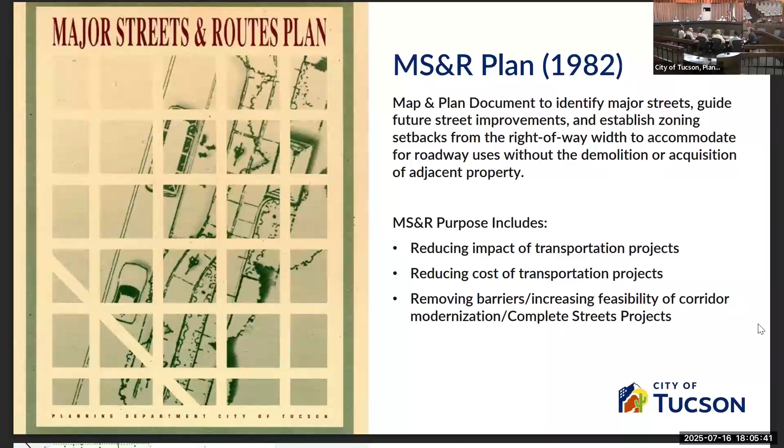If you don't have 5 feet back of a curb, you're not going to acquire property and take somebody's business to put in a sidewalk. It just doesn't pencil out. So this is a tool to allow us to advance those types of investments.

At the simplest level, the MS&R map does 2 things for city policy. It identifies future rights of way to facilitate long-term transportation investments. That's the value you see on the map: 120 feet, 105 feet, 100 feet.

That is how much space we need to address the proposed or planned transportation project. Goal 2, or purpose 2, is that it establishes street designations, the functional classification of the roadway. We talked a bit about this last time. That is calling roadways either arterials or collector streets, which describes how that roadway operates within our transportation system.

The presentation tonight breaks down both of those intents or goals. The specific goal of the 2025 update really has 2 parts. Goal 1 is that we've been doing a lot of transportation policy and planning work over the last 5 years, instigated through the passage of the Complete Streets policy by Tucson's mayor and council.

As an outcome of that, we've developed a new street design guide, which changes our cross sections of our roadways, basically how we allocate space within the amount of space that we have in the roadway. So 90 feet of right of way can look very different today than it did 10 years ago. How would we use that 90 feet of space within the roadway?

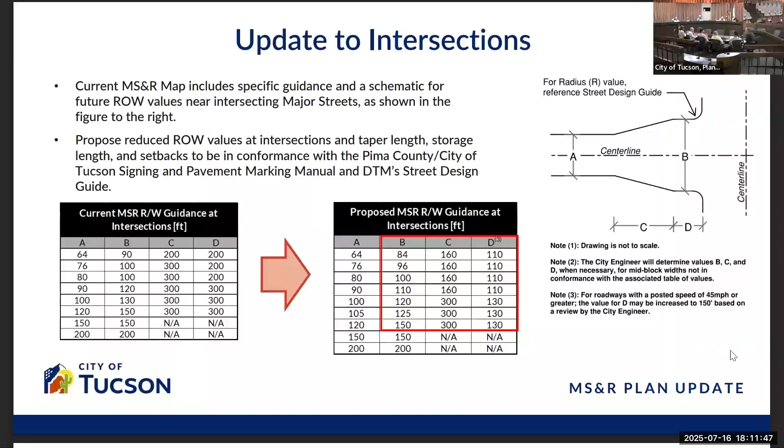In terms of the HAMP or the Atterbury Trails area, we revisited the Atterbury Trails infrastructure plan to make sure we were aligning the rights of way with what is being proposed in those developments in the state land in the southeast of the city.

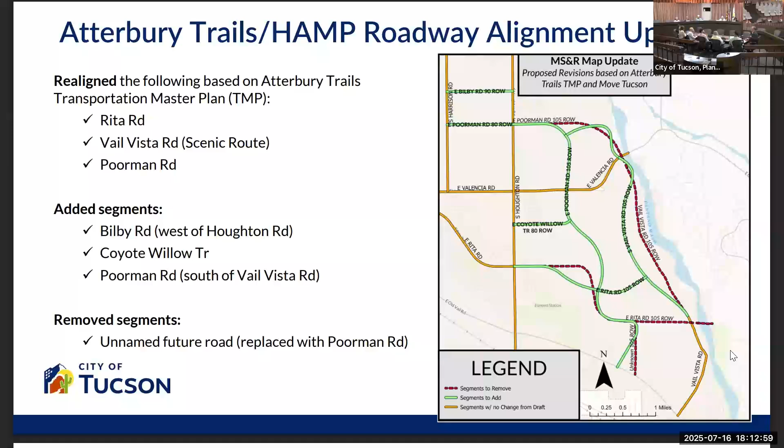We had a lengthy conversation last time about the purposes of the major streets and routes plan versus our transportation investment plans. We have two distinct plans that serve different but complementary purposes. Move Tucson is our long-range city-focused transportation investment plan, identifying specific needs on our corridors, proposed cross sections, project scopes, costs, and prioritization of when those investments should occur. It is comprehensive to the city and is one of the ways we advance our complete streets policy by identifying not only where we want to invest, but what our highest priority investments will be.

Those high priority investments were largely driven by the safety profile of the corridor, the lack of facilities for more vulnerable roadway users such as people walking and biking, as well as location within the city. We were over-investing in areas with a higher concentration of transportation vulnerable populations. We were deliberate and explicit in wanting to invest more heavily in safety projects, active mode projects, and lower income areas of the city, knowing those were more critical lifeline transportation choices for people who didn't have as much access to private automobiles.

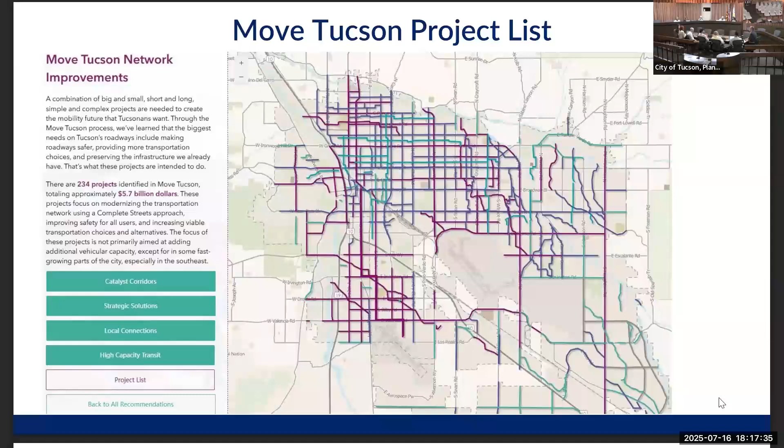We have bike boulevards, which will be on local streets. We have greenways, which will be following along water courses within the city. And then we also have projects that are transit operation projects or BRT projects or signal projects, which don't really have a right-of-way impact. But this is the totality of Tucson's planned transportation investments over that 20 to 30 year horizon. Again, the vast majority of these are modernization, safety, active modes type projects.

Another output of Move Tucson was something that we call the street typology, which is a complementary designation of roadways, which is guiding the way we design our streets in Tucson. The intent here is to give us direction for context-sensitive design efforts.

So the idea around context-sensitive design is that something like an arterial is a bit of a crude tool when you're thinking about how a roadway operates in your transportation system. An arterial, Congress is an arterial, and Houghton Road is an arterial. Those are very different roads. They operate very differently in our system, but they have the same classification or designation.

So what we did is we created this street typology, which guides us in how we allocate space in our rights of way, based on the complement of transportation to land use. So on the far east of the city, where you see that red-orange color gradation, we call those suburban thoroughfares and suburban connectors. Typically, those are serving areas with larger setbacks, more access control, typically lower bike and pedestrian activity, and typically longer trips that you're serving. So those design decisions are going to be driven more by that.

Whereas you get closer into downtown, you have what we're calling urban thoroughfares and urban collectors, which again, you're going to see more active mode users in those areas of the city, maybe more transit usage, maybe shorter trips, opportunities to offset some of those trips. You're going to have a more dense roadway network, more signals. So we are making design decisions on our corridors based on that typology. And then we have one more layer on this.

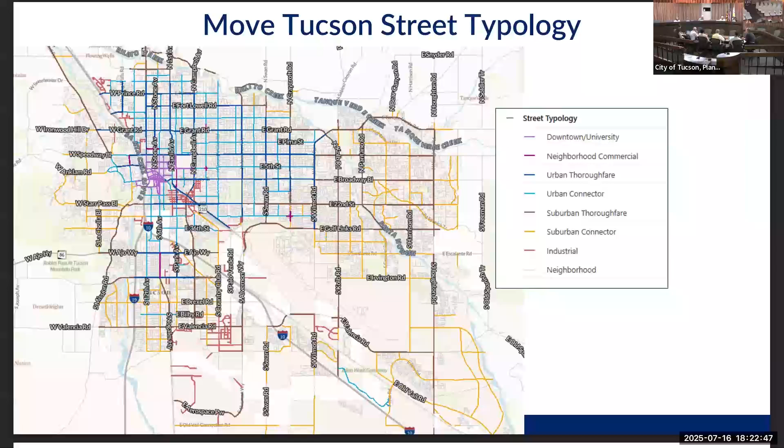Yep. Great question.

Can you elaborate on what a regionally significant corridor is going to mean for Glen? I believe that's Grant - I don't believe Glen has been identified as regionally significant. Oh, is Glen a bike priority street? We've actually got a project on that. Oh, I'm sorry, okay, never mind.

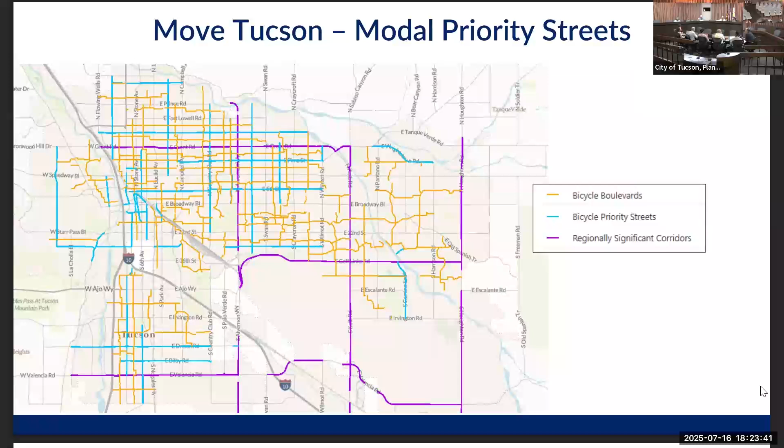On that note, I want to point out it looks like Oracle is not listed as a regionally significant corridor because that's a state route. Correct. Excellent observation - there are a couple on here that we need to revisit that are missing. If you notice the gaps too, that's where it comes in and out of city limits, so some of those are county facilities - we were just showing what's in the city. But Oracle absolutely is one. There's a regional plan driving this.

We can talk a little about how Move Tucson flowed into the major streets and routes, and how we were trying to be really attentive to meeting the goals of Move Tucson through this, and again trying to be a bit more surgical in our approach. So this is the decision flow chart we started with, and we're pulling back the covers now on our MS&R update.

This was the decision tree we went through when making those initial assignments. We started with that street typology and that modal overlay. The first place we went was within the downtown university district - we said we don't need additional right-of-way, these areas are kind of at their future build out.

This is not the purpose we're trying to solve. We're not adding additional capacity here, and we don't want additional setbacks. We want that human-scale walkable environment, the zero lot line development. We don't have needs there as a department, so let's put a zero value on those as an overall policy. Anything in the downtown area, anything around the university, is getting that zero value by default. We can talk about an example of that.

The next tier down, we looked at all of our 234 Move Tucson projects and where they were falling on our major streets and routes. We looked at that preferred or general cross-section from our complete streets efforts. The projects were really driven by deficiency—if we had a safety problem, if we were lacking sidewalks, if we didn't have connected bikeways, or some other deficiency on the roadway, we looked at that right-of-way value from Move Tucson. That was the value we wanted. So it wasn't just being reactive to traffic volumes; we were really trying to make sure we were accommodating the proposed projects.

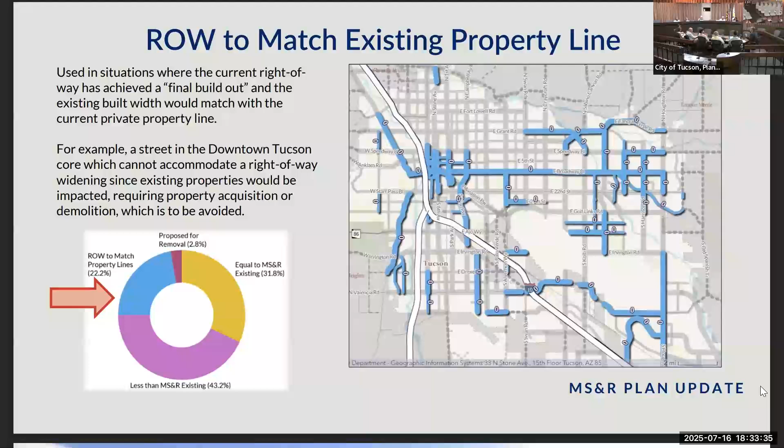This is 22% of the network under the proposed update. So there's a pretty substantial piece of the MS&R where we are functionally removing that piece of the MS&R on about 22% of our network under these updates. So again, there's not one size fits all, but we're trying to be strategic, remove those obstacles to infill development and redevelopment while also meeting our travel needs.

The Move Tucson project we have proposed is a bus rapid transit project. That BRT, if and when it comes to fruition, is going to operate in either a dedicated running way on one of those travel lanes or in mixed traffic. We don't need additional capacity for that. So this is that context. We've got those wide sidewalks, kind of that zero lot line development. And our current MS&R actually is holding this as 120 feet. And that has actually recently been a case where that has been a barrier, an obstacle to infill development.

120 feet is the same right of way width that Speedway is carrying. That assumes that Speedway or Stone basically into downtown would be a 6-lane roadway. And nowhere in our plans is Stone into downtown becoming a six lane roadway. So with this update, it's an opportunity for us to adjust. But up until now, we've been carrying this as 120 feet of right of way.

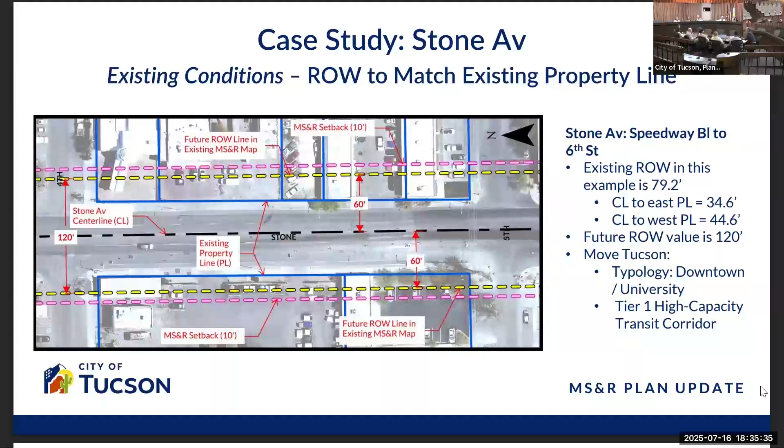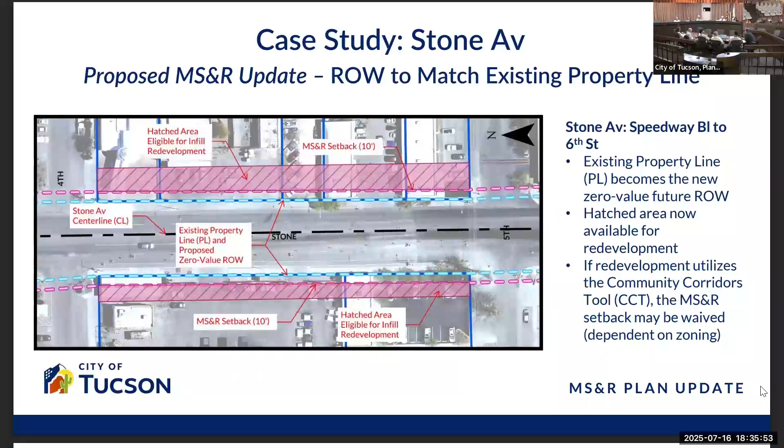So we don't see the need to maintain that 120 feet. And we think Stone Avenue as it stands right now is meeting its transportation purposes. And we are comfortable removing that right-of-way value. The current right-of-way on Stone Avenue is about 80 feet, so that would add about 20 feet of additional setback. So that whole area then in purple now becomes available essentially for infill development, intensification of those parcels, and they become much more attractive to developing along Stone Avenue, keeping that existing character of the corridor. And that was a decision we made based on what Move Tucson showed us about our travel needs on Stone Avenue. So we were comfortable putting that zero value.

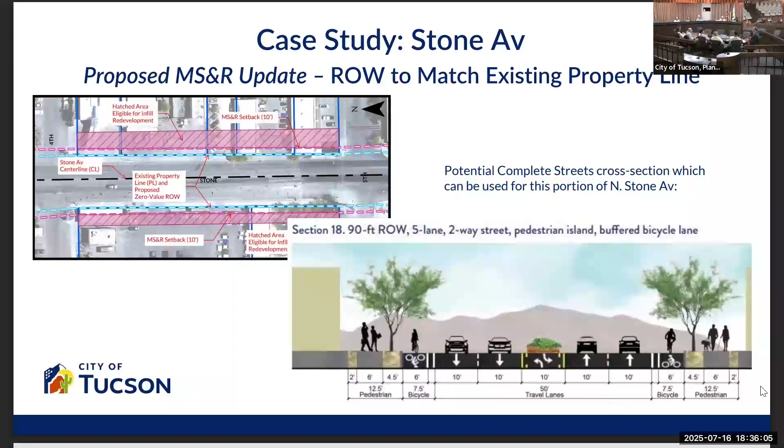And we've done this around the city, but we just wanted to illustrate it with this particular case.

The other largest change that we are proposing is the reduction, but maintaining a value, through the major streets and routes. So these are all the corridors where we are actually reducing the right-of-way from the current value to a proposed reduced value, but still retaining a value. So this is where we'd be going from 120 feet to say 90 feet, and we only need 90 feet of right-of-way to deliver our transportation project. So that's going to eliminate or remove a major obstacle to infill or development, while still providing enough space for us to advance our transportation goals.

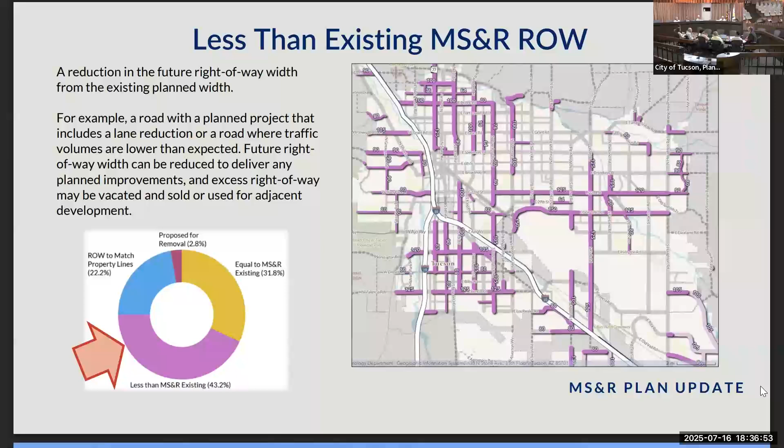Between the removal of the MS&R, the zero value or build-to-lot-line, and the reduction, that is about 70% of the updates being proposed with this update. So only 30% are keeping their existing value. And there is not a single road in which we are increasing the right-of-way value. We were deliberate with that. We started this by saying it's going to stay the same, it's going to get smaller, or it's going to go away. In no case is it going to get bigger.

One we heard a lot of comments about through this process was Pima. From Alvernon to Swan, the existing condition is uncurbed, no street lighting, no sidewalks. There are bike lanes or shoulders, 11-foot travel lanes. It's pretty undeveloped, not necessarily meeting our complete street goals as a city. The current right-of-way on this corridor is 90 feet, which is what we are holding through the MS&R, and that could be a very comfortable 3-lane or a constrained 4-lane roadway.

The existing property line or lot lines along this section of Pima vary between 80 and 90 feet. So a lot of the setbacks are already meeting that 90-foot setback. We're not actually, on redevelopment, going to be gaining space on this.

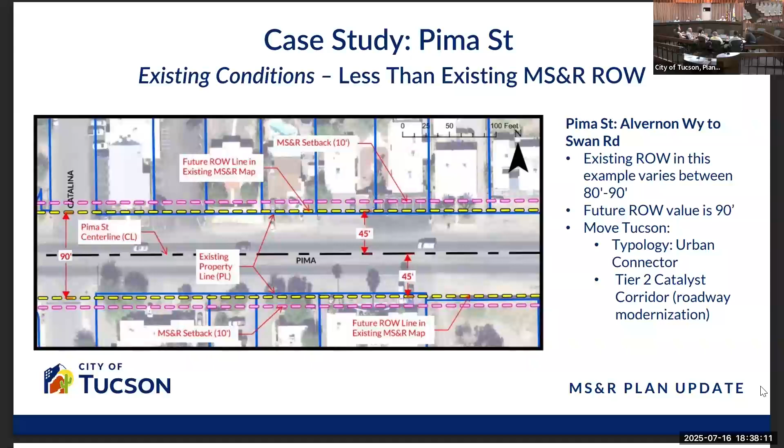But we looked at the needs under Move Tucson. It was identified as an urban connector type project. Based on the traffic volumes and what was needed, we are proposing this as a modernization project, for which we only need 76 feet. So what we are proposing is reducing this from 90 to 76 feet.

What this does is for residents who are at that 80-foot setback, it gives them greater use of their property. If they're at that 80 feet, they are within the future half right-of-way, so there's going to be a lot of restrictions on how they use their property if they wanted to do some things within their existing lot. A lot of these are residential, with some multifamily.

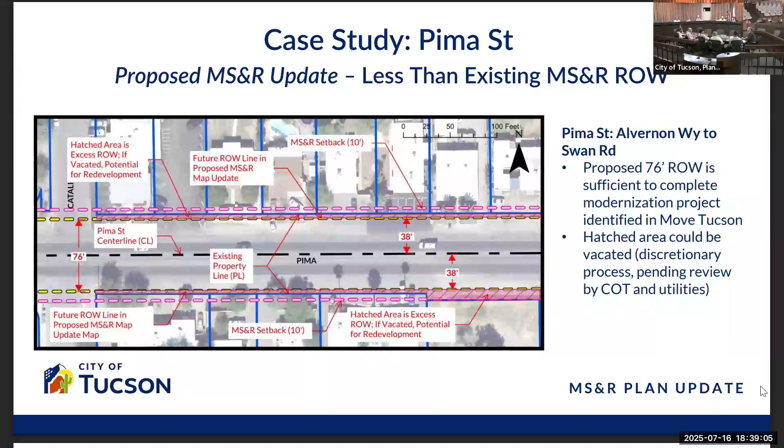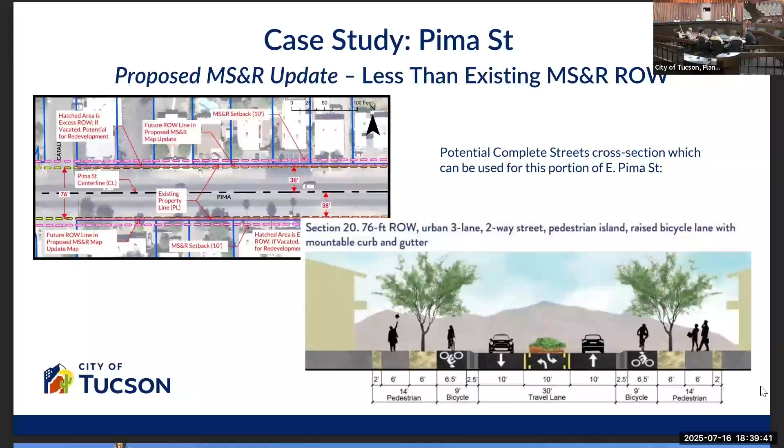That's a 3-lane roadway, with narrow travel lanes, protected bike lanes, a wide landscaping strip, and wide sidewalks. We heard from a lot of residents that they want to see this on Pima, and they were concerned about that reduction in right-of-way. Based on what we have around the city, 76 feet provides more than adequate space to make that investment.

It provides some opportunity for residents, especially those with narrow rights of way, to not be an obstacle to their projects. Here's another case study where we are reducing the future right of way - this is First Avenue, Fort Lowell to Grant Road. We were carrying 120 feet on this, again like Speedway, assuming this would be widened to a 6-lane roadway, consistent with the RTA plan. This was proposed as a 6-lane widening, but we have subsequently downscoped this project to a 4-lane divided roadway, which means we no longer need that 120 feet.

However, we still do need some feet. If you look at the current condition of First Avenue, most of the right-of-way out here is about 75 to 80 feet for 5 lanes, which means everything is absolutely squeezed down. You see off-street parking encroaching into where that sidewalk area would be, and there are no sidewalks on large extents of this. So to really build out a comfortable 4-lane roadway, you probably need around 105 feet of public right-of-way. Currently, we have that 75 to 80.

So in the event that there's redevelopment that occurs before we get out there and do our big capital project on First Avenue, we don't want to make this a zero value so that they're building into the right-of-way - then we would have to purchase and demolish that property. So by keeping that 105, we keep them out of the project footprint, and we can advance this in the event that in the next 2 to 3 years there's any new development on First Avenue as we prepare the First Ave project.

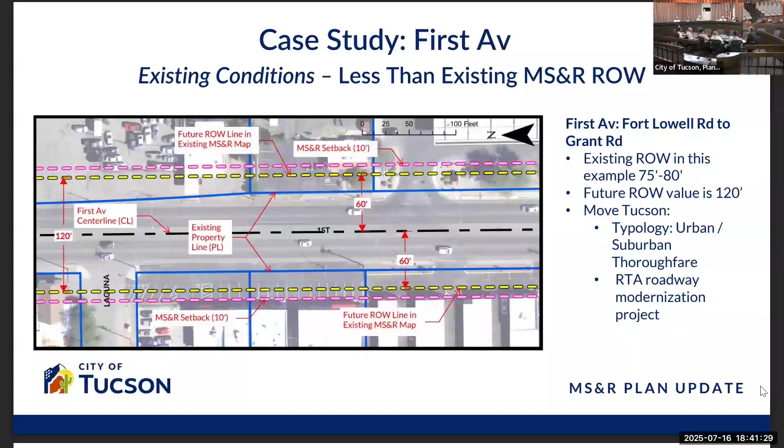So we need that 15 to 20 feet to really reduce costs and reduce impact. One of the great things about this First Avenue project is that by going from 6 lanes to 4 lanes, we have significantly reduced the number of buildings we have to touch and the amount of property we have to take. But 75 feet is just not enough space to get what we need in this roadway.

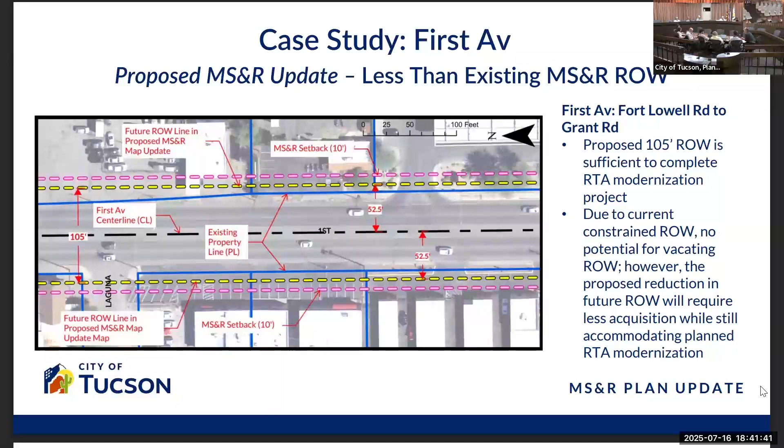And then the final piece, about 31% of this update, is just retaining the existing dimension on the MS&R. This is one we want to point out - Speedway, Alvernon to Swan. I mentioned this earlier: this is an existing 6-lane roadway, and this one is squeezed to basically its absolute minimum of every possible dimension. You have a 5-foot bike lane next to 6 lanes of traffic, and every one of those travel lanes is 10 feet.

So there is not another foot. We have frequent transit service on Speedway. And as you can see, just outside of the curb in front of the bowling alley, you have parking that is on private property that is basically sitting exactly where you'd want to install those sidewalks.

So if we wanted to even just get sidewalks onto Speedway, that would be extremely cost prohibitive, because if you look on the other side of the street, kind of through the median, it's even tighter. The on-street parking stuff we can deal with, but we have structures, we have porches, we have all kinds of things happening within that 6 feet that we have to be able to install a sidewalk.

And even in some cases it is off-street parking, but it's the only parking for that business. So if we take that parking, that business is probably going to have to close their doors. So we are proposing that we retain that 120 feet on Speedway to give us some chance at some date in the future of getting accessible sidewalks on Speedway, which I will be a very happy man if I retire from the city of Tucson with sidewalks on Speedway.

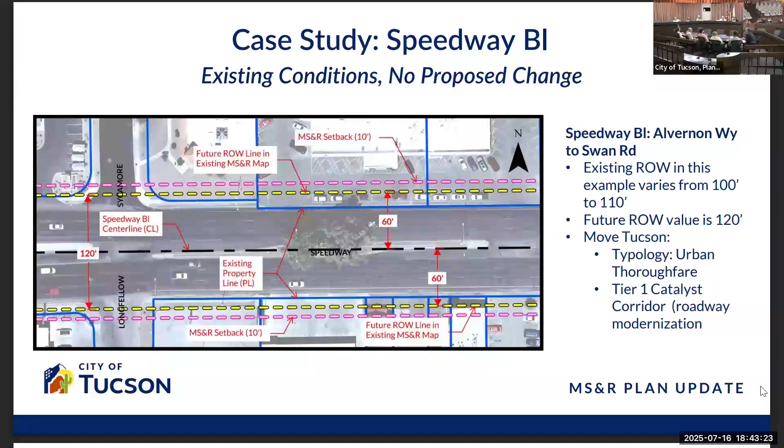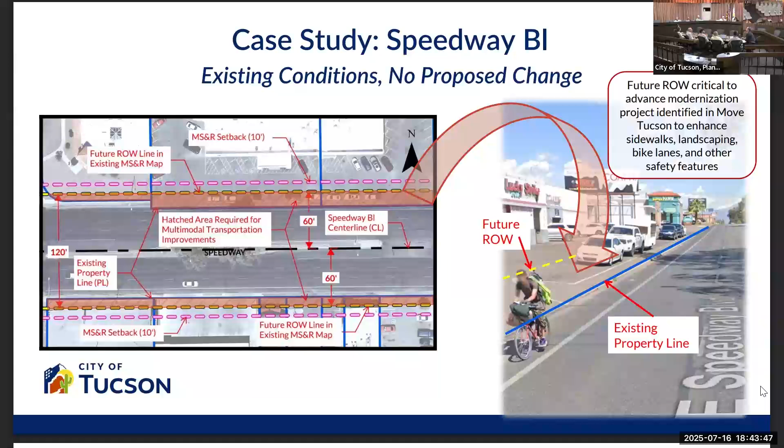I'll just show you. So this is an example of where that future 120-foot right-of-way line would be, that yellow line on the image. You see it puts it behind that off-street parking, which isn't as much as we would want, but it does at least give us an opportunity to get those sidewalks in on public right-of-way, which wouldn't be a major obstacle and completely cost prohibitive and disruptive to those businesses.

The longer term vision that we have for Speedway, and you can see it kind of in the cut sheet in the bottom right there, would actually be potentially going into the middle of the roadway. This is when we were carrying those 22-foot medians. I know there's some beautiful trees in there and other things.

But if we want to get space and not be knocking over and doing a bunch of demolitions, and get those low stress bikeways in there, get the landscaping where the people actually are, and get connected sidewalks, maybe there's an opportunity to take 6 to 8 feet out of that median and fit all of that in within that 120 feet, in the event that we get that kind of major capital funding for a $70 million project in the future.

In the medium term, though, if we could just get those sidewalks in, that would be a huge win. So that is really to illustrate the value of what the MS&R does and why it's so important, because otherwise, if those buildings keep redeveloping along where those current parcel lines are on Speedway, that's going to be extremely difficult.

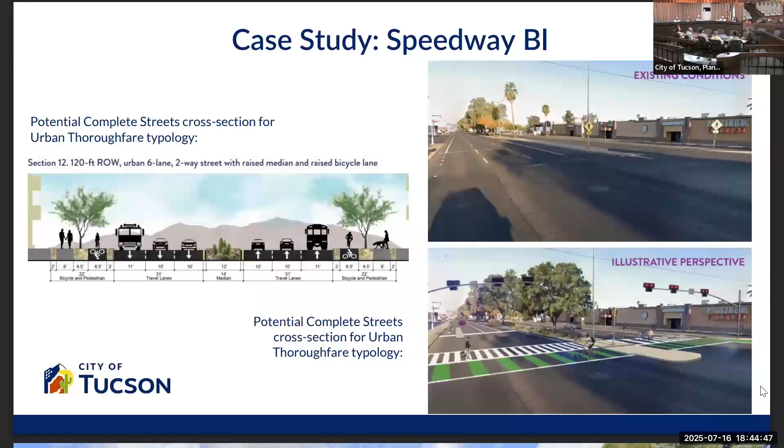And finally, one final one, again this is one where we would be proposing a roadway widening. This is Irvington from Kolb to Houghton, 2-lane, uncurbed, kind of more rural context. There's been a lot of development on the southeast. We continue to see that with Atterbury Trails and the Hamp area.

Traffic continues to grow. We are carrying 105 feet out here. We actually have 150, so way more than enough, but we just want to make sure that we are reserving enough space, because the long-term plan for this roadway, being a more rural context, actually provides some interesting opportunities.

Wait for it. Almost there.

The ultimate build out would be a median divided 4-lane roadway, but because it's more rural in nature, we could take additional right of way and reserve that to have offset more like side paths, recreational trails, outside of a more urban context where you do something like a traditional concrete sidewalk. So in a case like this, you might want to reserve a little bit more right of way, again not necessarily just for the roadway widening itself, but to accommodate those recreational users.

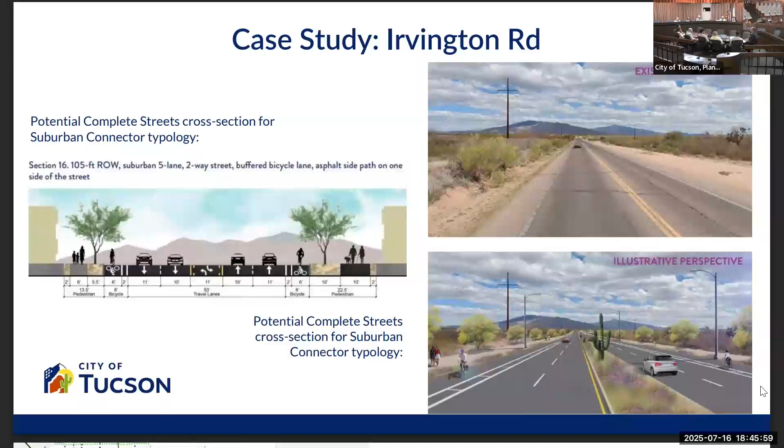Patrick, in the United States, do we have any examples of bicycle and pedestrian infrastructure being placed in the median? I think Washington, D.C. actually does. Not exactly the same, obviously the context is very different, but it's right by the Capitol. They've put it in the middle. And you actually toured it. Do you have any?

They do it all over in Mexico City. Yes, so it was a running bike lane right in the center of traffic, and it was very safe and it felt very protected. It had nice buffers on each side. It was widely used, so it was really nice.

I think some of the reasons were the special requirements of the roadways going down some of those processional ways in front of the Capitol and the IRS building. So they needed to pop some of that stuff out when they had special events happening in town. That was kind of the decision logic and some examples and case studies of how we went through.

Again, we're trying to be more strategic in how we assign those rights of way. We're trying to be responsive to the context, integrate Move Tucson, our complete streets policy, at the same time meeting those goals of allowing additional infill development and redevelopment in our corridors and making sure that the MS&R is serving both of those purposes.

As I mentioned previously, the second role of the MS&R is really to establish the street designations, the arterials and the collectors. There are very few redesignations, but there were a couple that we were proposing. So I want to talk a little bit, very briefly, about the criteria we use to really determine what's a local street, what's a collector street, and what's an arterial street.

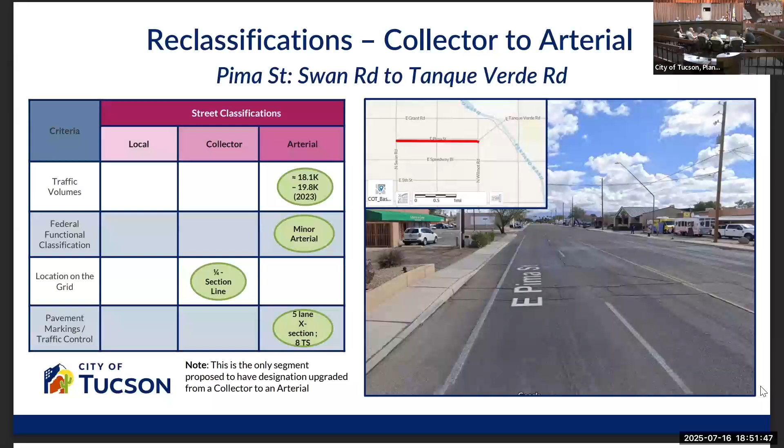So our recommendation is to reclassify this as an arterial, not to say it needs to be more of an arterial, only to be descriptive of how it's currently operating based on the criteria we've established. We're not proposing changing how it operates in any meaningful way, it's just being descriptive. These classifications have less effect on how the roadway operates, and in fact that section I showed you, we'll use this as a case.

Limberlost is another reclassification. It's currently classified as a local street in our MS&R. It sees about 3,000 to 7,000 vehicles per day, again well above that 2,500 threshold, with higher volumes between First and Stone, Oracle, in that section. It is federally classified as a major collector. It is on the 16th section line, that quarter mile spacing. It has traffic control, striping, and is 2 to 5 lanes.

This one, we are proposing changing from local to collector, but that is not changing our ability to do traffic calming or to modernize or rethink how this roadway operates. In fact, we have an active project under design on Limberlost, which will remove the center turn lane because it's one of our bike priority streets, adding protected bike lanes, speed tables, street lighting, continuous and accessible sidewalks. That can happen whether it's a local street or a collector street. It doesn't change the tools we have available, it just makes it more accurately describe how this roadway is currently operating.

And then finally, we have an example of something currently in the MS&R that we're proposing taking off, because it's not really meeting the criteria of a collector street. This is Bonanza from Kenyon to 22nd. It's got below 1,000 ADT in terms of traffic counts. It is federally designated as a minor collector, and as I said, that minor collector can either be local or a collector depending on the other criteria, but it was something we looked at.

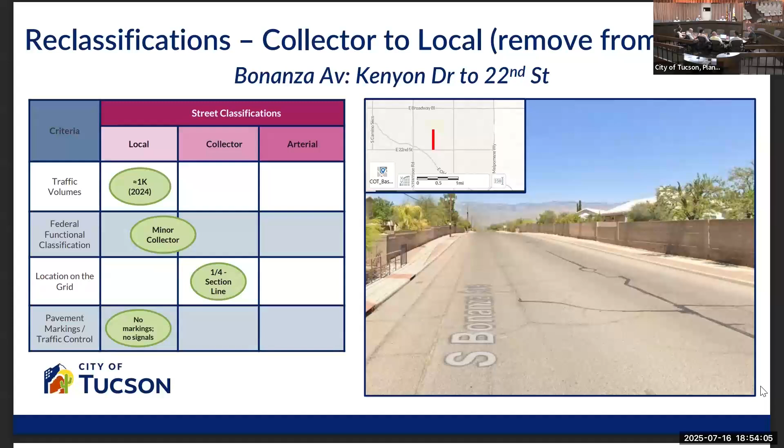That was a fairly minor number of classification changes we are proposing. The big one, I think, being Pima, which got the most attention from the community. So we just wanted to show the criteria we used to make those determinations. So, that's kind of the end of the presentation.

With regard to our next steps, we again appreciate the opportunity to come back and continue this discussion, and hopefully provide more information that was helpful in informing your determination. We would be seeking a recommendation to move this to public hearing in August, ultimately bringing it to mayor and council for adoption or action at least by the end of September, potentially early October. With that, I can take any additional questions.

Chair, thank you very much. I have some questions here.

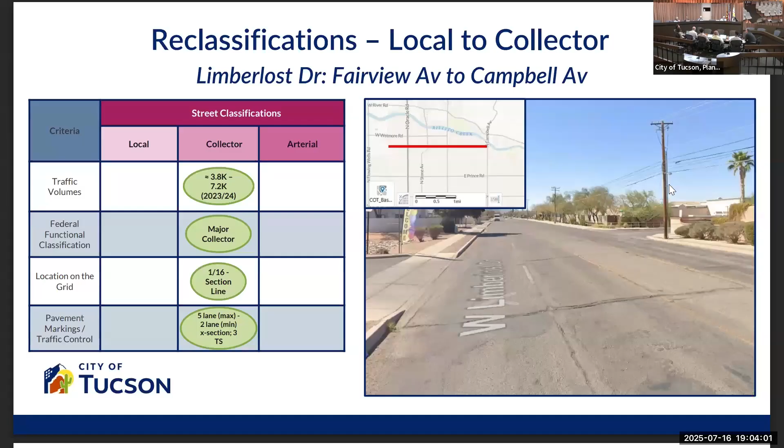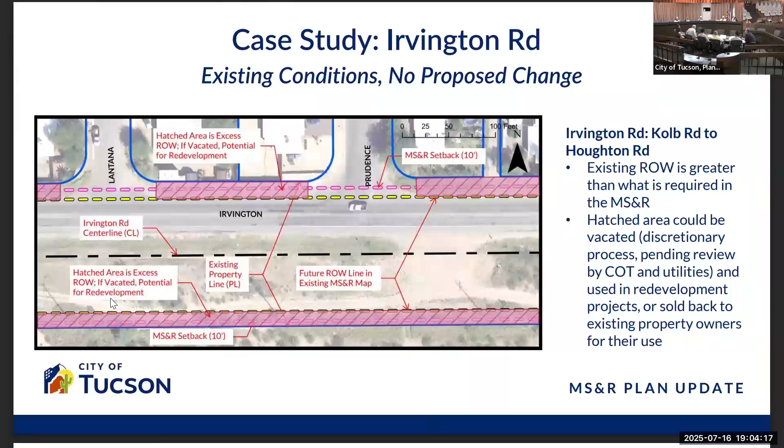Great question. So it gets back to really the two intents of the MS&R. The proposed for removal means they're not meeting those criteria for why it should be designated as a collector or an arterial. So for like Bonanza, it fell below that threshold of traffic volumes. It didn't have the traffic controls on it. Functionally, that's a local street, so we redesignated it as a local street.

So we took a look at those. Some others were kind of remnants. Some were on private property, for example, or they were privately owned streets. We cleaned that up, we removed those. Some of them were paper routes that were non-existing and we have no intention of ever building.

One was, for example, there was a flyover at Prince that was basically connecting to Goret across the Santa Cruz. That project's never gonna happen. We took that out. So it's a mixed bag of why we remove projects.

The ones where we are removing the right-of-way is that we still see the value in keeping it designated as an arterial or a collector street, given the way it operates, such as Pima Street that we saw. But the roadway's functionally built out. We don't need any additional right-of-way.

Stone Avenue is one, so that would continue to operate as an arterial, but we are putting a zero value on that, or match existing property line, because with redevelopment we're not going to seek that dedication for additional public investment. Does that make sense? Yeah, I think so.

And I guess I would like to ask maybe Corin and Dan, if you could just illustrate with maybe a couple of case studies, if you have any, of what, if these proposed changes were adopted by mayor and council as soon as September, what would that unlock for developers? And how quickly? In other words, what kind of a barrier are we currently seeing? How much is this holding back?